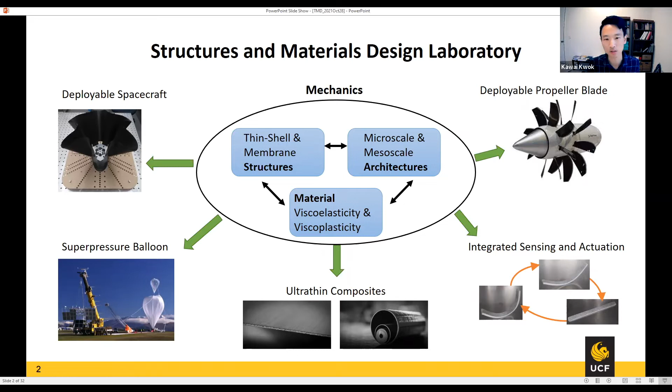So this is an overview of the different areas that we're moving on to, and you can see that all of these actually relate to the size of the structure. All the structures and problems that we work with have this common trait that their areas or volume are large, and there are a few purposes or reasons for that.

In space you want to harness the electromagnetic spectrum, for making antennas and telescopes, trying to manipulate that spectrum. And if you have a larger area in space, then you can obviously get a lot better signal. That is why they should be large.

Also solar arrays and solar sails are quite straightforward in why they should be large. Your larger arrays get you more solar energy. You can have more area span, and that converts more solar energy.

Solar radiation pressure is a propulsion. If you have a larger area, you can get a higher propulsion force. So it allows you to get some nice thrust in space for free.

And the last two bullets are harnessing buoyancy, and that is more on the volume. If you have a higher volume, then you can have a higher lifting force, and that relates to the balloons that we talked about.

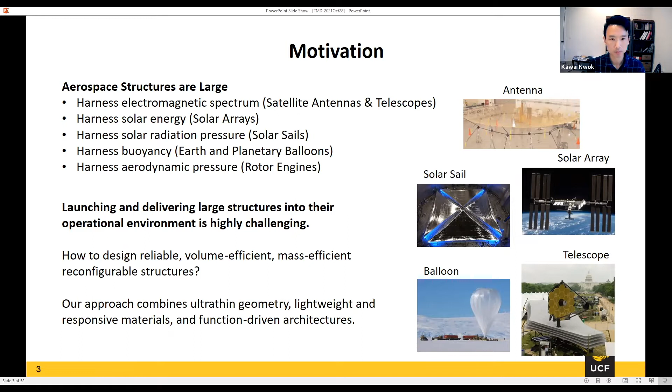There are two projects I want to specifically talk about - these are more recent work that we've done, so I feel more excited to share about those than the others. The first one is thin ply composite laminates, and how we model that, and try to understand the behavior and how we use that in looking at deployable spacecraft booms.

The second one is the integrated sensing and actuation material that we're developing, based on this shape memory polymer and also a carbon nanotube material.

So I'd like to spend a little bit more time on this one, mostly on the first topic, and some on the second topic. Most of them are centered more around the materials and architectures for making the structures. So the first topic is thin ply composite laminates.

Just a little bit of background on that. Thin ply composites are composites that are much thinner than traditional composites, and this is enabled by a process called a spreading process. Normally you have tows in a composite that are larger and contain a lot of fibers in a tow, and typically they are sort of teardrop shaped without very high aspect ratio. But there is a technique that spreads out these tows, and the end product is a spread tow of carbon fibers, with a much higher aspect ratio.

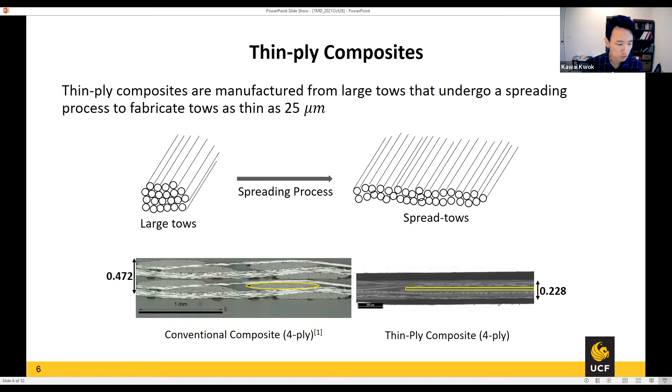If we take a look at the difference between the resulting composites, on the left-hand side is a traditional composite, with the tow circled by the yellow ellipse - that's the original one. In a thin ply composite, it's really thin - the same amount of fibers are stretched out so it becomes really flat. The idea is that you can really compress the thickness of the final composite, to use that small thickness to achieve high folding curvature.

There are some examples of composites used in space, just taking this from the literature. There are antennas, and the ROSA, which is a solar array structure deployed by two booms made of this composite. And deorbiter is a type of sailcraft in space that you can use to deorbit things you don't want in orbit anymore. So a lot of them are using composites now in spacecraft structures, and in particular deployable spacecraft structures.

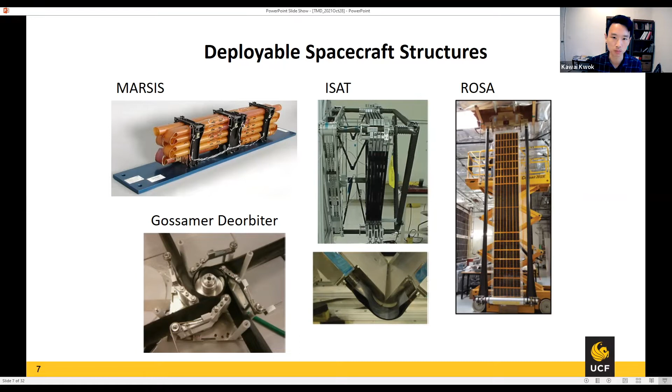One example we actually work very closely with at the moment is with NASA, on one of the missions they are working on - a new design for a solar sail system. They call it the Advanced Composites-Based Solar Sail System. Basically it's a solar sail with 4 booms in the middle, in the center, going across, and then you have a sail, a very thin membrane that is stretched out and deployed by the boom.

So the booms are kind of a structural support for that sail, and they intend to use this as a sail mission to look at asteroids and a little bit farther out in space without propulsion, without a propeller. The booms used to support that structure have a geometry that looks like an omega shape, made out of thin ply composite booms. You can roll it up, and eventually it's all stored inside a mechanism within the satellite, and that's how the whole thing is put together.

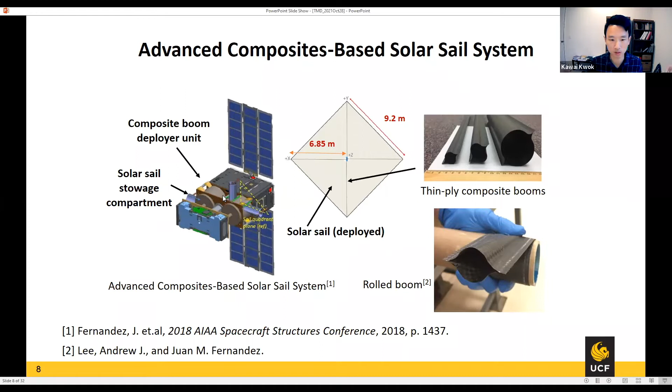Now, there's something about the mechanics of that shape of the boom. You can see from the previous slide it's really more like an omega shape, manufactured from 2 open pieces of a cylindrical type thin shell structure. This has been studied for many years - it's a building block that has been used very intensively in the deployable space community, and has been around for many years. Obviously they were not composites when they first came out, but they are increasingly made from composites now.

Just a little bit about the fundamental principles, so we understand how this works. Basically the mechanical principle behind this is a snapping instability. If you take a tape spring, you'll notice that if you bend it, suddenly it goes from uniform bending into a local buckling. Once you get into a local buckling, the buckle actually stays with the same radius - it doesn't change anymore. It can move around, but it is a state that is a localized buckle.

If you take a look at the moment rotation diagram of that, basically the behavior is that you have uniform bending and then you snap it, and the load drops significantly, and you have a local buckle. This is a very nice behavior to exploit, because you have a large increase in rotation - a large shape change - but you need only a very small moment to provide it. So this is a great way to make a deployable structure, because the loading applied and the shape change you get is not proportional to the loading applied. The loading is always low. So the snapping instability is really the thing behind all this work.

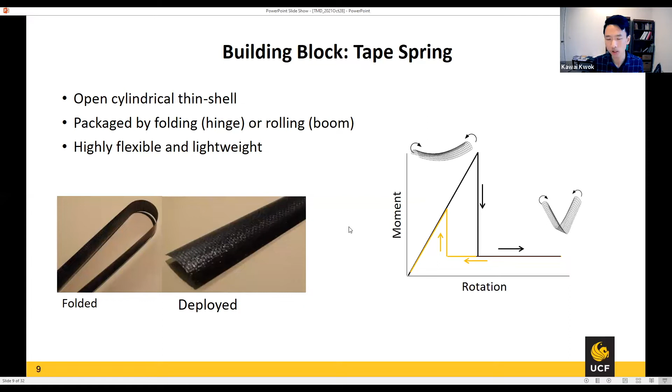So just go back to this real quick, right? On the unloading path, once you release that load, because this is a higher moment, it goes back to a lower energy state, and that will definitely go back if this is elastic, and it wants to go back instantaneously. But in the case that your material is viscoelastic, it actually does not come back instantaneously.

So there's some creep after deployment. There's still a recovery that can take a long time, and that is not a good thing for deployable structures, because we like to have the correct shape so that we achieve the same stiffness that we designed it to be, and the same shape accuracy we like it to have when it's deployed.

And also another thing that can happen is that you can actually change the structural behavior entirely, because one of the effects of viscoelasticity is to change the stability landscape of the structure.

Tape springs can be made into having different stable configurations, and there was actual work on that from Sergio Pellegrino. There was a very pioneering work on how you make bistable tape springs, based on elastic tape springs. Then later on, if we apply composite to make bistable tape springs, this problem comes up, that sometimes you actually lose the bistability if you store it for too long.

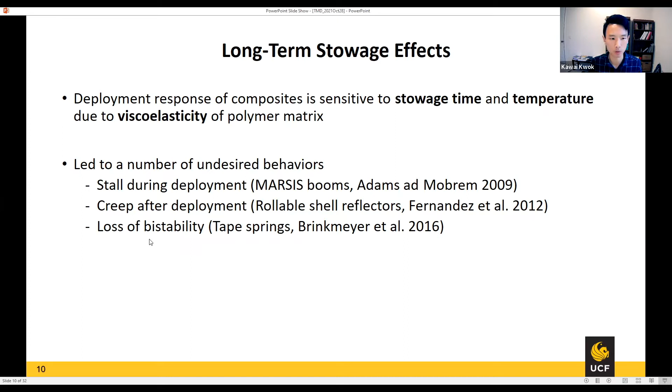So what we are trying to do here is understand that, and be able to model that composite material. There's a collaboration with NASA, mostly to look at the composite booms in the solar sail system they're designing, and provide the modeling capabilities to them, trying to understand different lamination, and how we can put a number on that stowage effect on the recovery.

So we started with sort of linear viscoelastic properties, looking at the matrix material and characterizing it. That's really the first step. This is a very fundamental thing about viscoelasticity, that you can characterize it at different temperatures, and you can form something called the master curve, which describes the modulus change over time.

So this is the experimental data that we obtained in the lab, for a particular epoxy that is a candidate composite material for that space application. You describe that relaxation modulus by something called a Prony series, so you can describe that for a very long time. Obviously we did not run this experiment for that long; it was actually combined from several different tests at different temperatures.

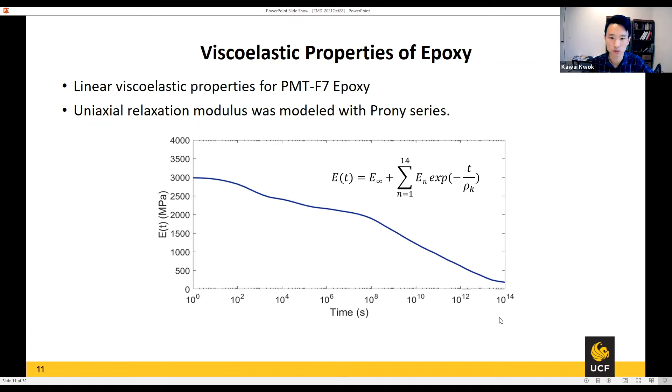And really, but then there is only the matrix. So to be able to look at the various effects, obviously, if you incorporate the fibers at different levels, that changes things.

Then you go to the next level architecture on the mesoscale, where you see this woven layer. If you use more than one ply, you get even more variation, because the plain weave pattern of each ply doesn't have to match up. Sometimes there are gaps between different layers, mismatches between those. In thin ply composites, these things matter a lot more than traditional composites, so we see a lot more variability from composite to composite.

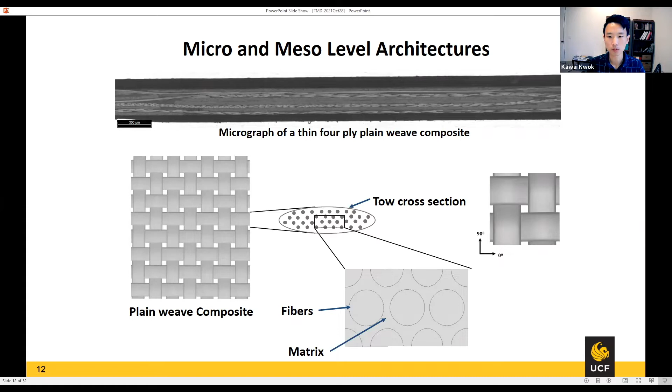The approach we are following is a two-scale micromechanics approach, trying to capture the micro and mesoscale variation of those fibers inside the composite.

We formulate a viscoelastic plate model. We take the Kirchhoff linear plate model and think about what happens if there's viscoelasticity. So we reformulate the whole ABD matrix of the composite classical lamination plate theory, but now with the addition of describing the variation over time of that composite.

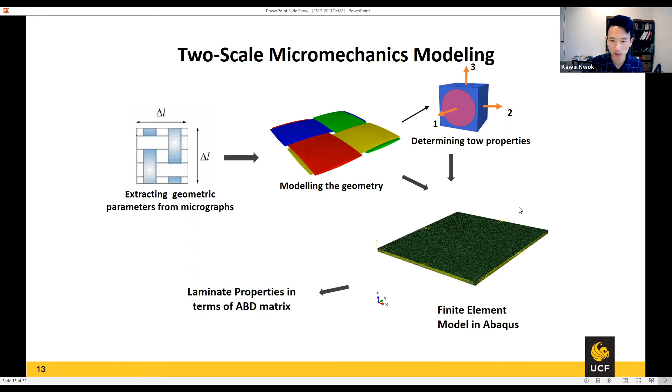The process goes from getting the unit cell on the tow, then to the laminate including all that geometry, and then to the finite element, carrying out that homogenization. In the end, we get a constitutive equation that looks exactly like a linear viscoelastic constitutive equation.

We have to do that at each level. The first level, when we do the homogenization or mechanics of a single tow, we have to preserve that this is still a three-dimensional continuum. So we describe that unidirectional tow as a 3D continuum with a stiffness matrix expressed in terms of Prony series. This is the classical Boltzmann superposition integral for viscoelastic material, so you have the strain or stress as an integral equation over time. This is no longer elastic but viscoelastic, and all of these are described by a relaxation modulus tensor.

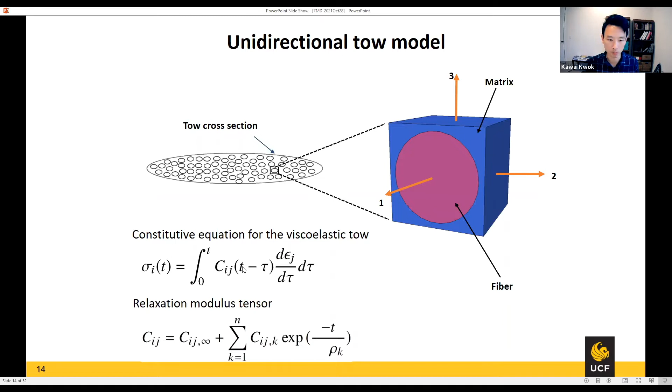Each of them is a Prony series, a series in time described by relaxation time. From the matrix characterized experimentally, and the fiber, which at the moment is assumed to be linear elastic, we can compute this general tensor, which is anisotropic but all time dependent. Taking from that we go to the next level, because each tow in a plain weave is now described by a time-dependent stiffness matrix C.

But what we really want is not to carry all these three-dimensional constitutive equations all the time, because that's very heavy for computation. So we do a dimensional reduction, just like plate theory, arriving at a constitutive equation in terms of moments and in-plane forces, which gives us less.

You can describe that with just the ABD matrix again, but now it's not elastic, it's viscoelastic, so all of these terms are Prony series. You can get that purely from the experimental and computational simulation.

This is a picture of what we actually have inside the simulation: a plain weave unit cell with 4 layers of thin ply composite making up the total composite. In this case, we're trying to do a bending simulation to get out the bending stiffness. D is the bending stiffness, A is the in-plane stretching, and B is the coupling between bending and in-plane behavior.

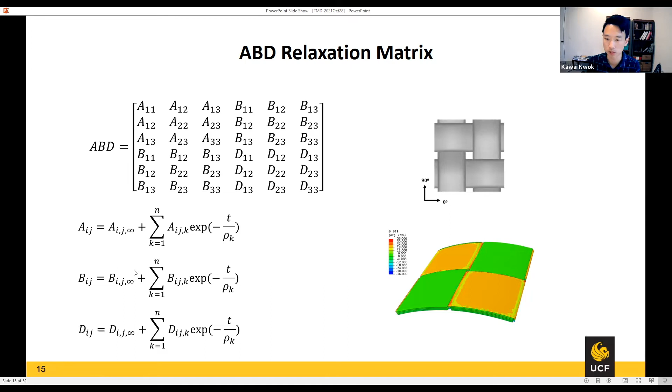We carry out some testing using a methodology called the column bending test. It's been developed in the community, mostly by a very nice man called Tom Murphey, who has been working in that field for a long time, doing very inspiring and creative work over the years.

So we are using that as a way to do the relaxation test so that we can validate our model. This has a few advantages over, for example, the traditional four-point bending test. And when it comes to thin ply, this elastic property characterization is even more useful.

When I did my PhD, I used a four-point bending test, and then as we go to a high temperature, we have to have a thermal chamber that runs around the sample, and a lot of vibration happens. Because the thin ply composite is so thin, all the noise generated from that four-point bending test just becomes very messy and kind of kills all the data from the test, because the relaxation typically is not very high.

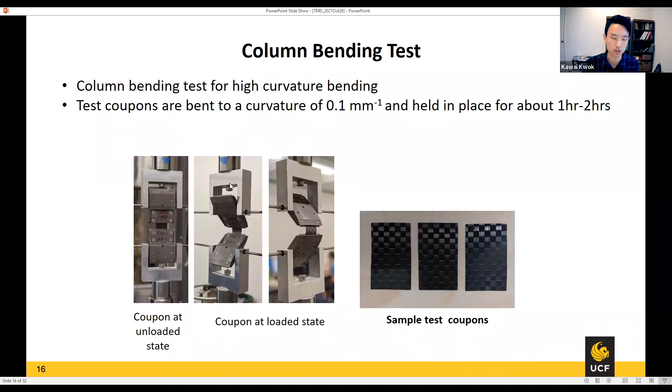The other reason is actually the curvature you can get to is a lot higher in this test. So basically, in the column bending test, you clamp the material inside the fixture and apply the compression force. And because that compression force is actually slightly offset from the sample, you create a bending moment.

M30S is the fiber, and that is the matrix that we're looking at, and we did this column bending relaxation test. Basically, we imposed a certain curvature and fixed it for some time. We'll see that the bending moment will relax over time, and that is what we want to capture, because that's what we compute from the mechanics model.

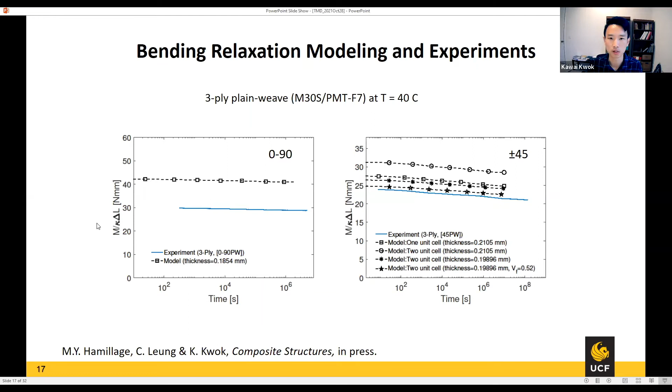But if you look at the time dependence again, they go down in a manner that is consistent with our simulation. So this is kind of a laminate-level validation and overall behavior.

So we went ahead and looked at this composite, and there are some funky behavior as well as we found out along the way. Some of these on the left hand side, we're plotting the in-plane relaxation, so it's just stretching, and we're expecting all of these relaxation to go down, right? So relaxation is always, the stiffness always goes down over time.

And if we apply in plane stretching of the composite, then the stiffness should go down. There are a few papers that also study similar things, and sometimes we get an upward going curve over time. I thought that was quite counterintuitive, so we took another look into it. Why is that, is that real? Is it just a numerical thing, or is it real because of something else?

What we found out is that it really depends on how you arrange your ply configuration. So A12 is the coupling - if you stretch in one direction, what is the coupling stiffness in the transverse direction? The other two have no problem, but that is the only thing that caught our attention.

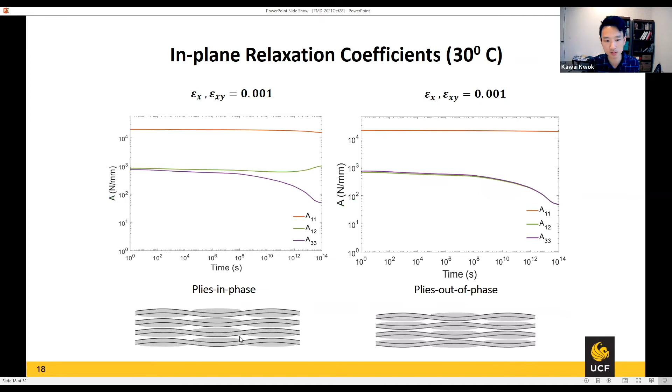If you look at an axis in the middle, you don't actually get a mirror symmetry. Because of that, you get a much stronger coupling in plane stretching configuration. In reality, the composite is not either of these extreme configurations, so you get a sort of random distribution. But it seems that geometric nonlinearity plays quite a big role, and how you arrange the ply makes quite a big difference on the properties.

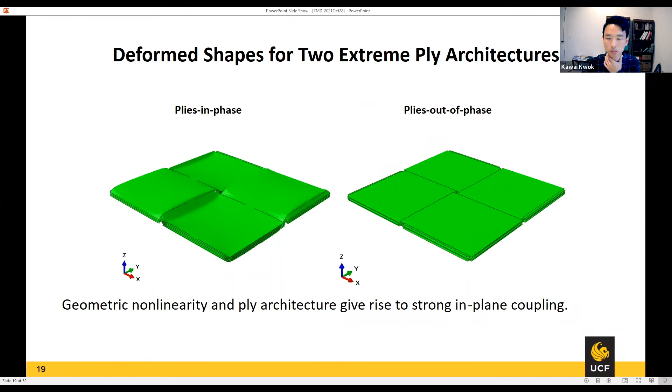The other response that we get from it is a localization response. So we take a look at this unit cell model that we have, and subject it to real high curvature over an extended period of time. We're trying to understand how this thin ply composite, if you roll it around for some time, suddenly snaps, breaks and fails.

It does not fail as you fold it elastically at the failure limit, but you hold it for some time and it suddenly fails. So it's a time-dependent failure, and we figured out how that could be, because it doesn't fail at the beginning. We thought it would just relax over time and shouldn't fail at all, not the first instant but sometime later. So that's another question we found interesting.

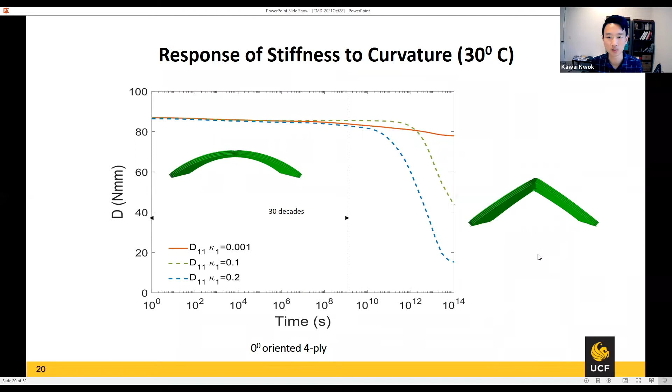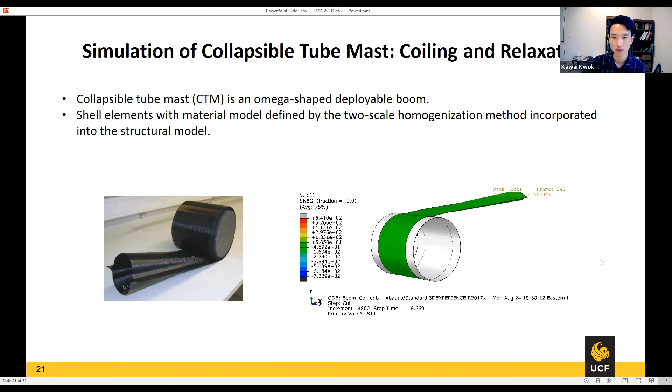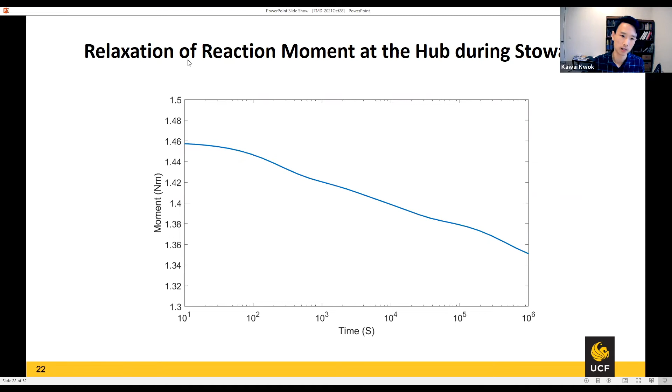We also want to apply this to simulate the actual deployable boom and look at the coiling and relaxation. This is an example we've been working on for the NASA mission, just to see how much relaxation we have - this is still work in progress. I'm showing the coiling simulation for the omega boom, now with the relaxation homogenization model incorporated, and we're able to run the coiling simulation. What we get out is how the reaction moment at the hub relaxes over time, which is something we can now predict from our model.

So I want to go to the second topic. I know I've been talking for a while, but I promise the second topic won't be as long. I'm going to show you some of the idea and what we're thinking about for the next steps.

The integrated shape actuating and strain sensing composite, as I mentioned before. The idea is to have a tightly miniature thin-ply composite that has not just stiffness properties and foldability, but also actuation, and strain sensing capability with embedded strain sensors. We make use of functional materials to achieve that.

We're also looking at a shape memory polymer that has this behavior where you can program the shape of the material by going through a mechanical cycle. So, in order to have both actuation and sensing together, we have to combine the capabilities of both materials.

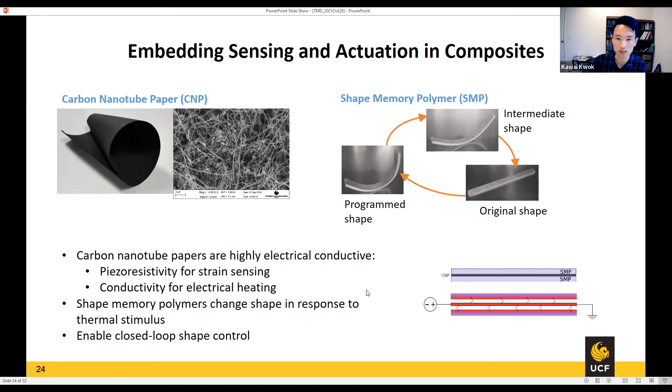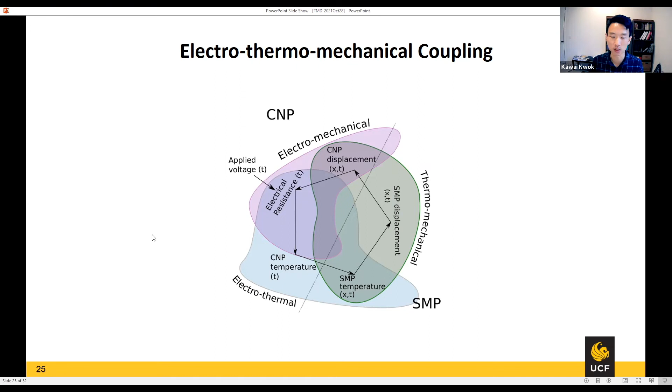So the problem really is a coupling between the electromechanical behavior, the thermomechanical behavior, and the electrothermal behavior. You have the carbon nanotubes that heat up, that heat conducted to the shape memory polymer, which can then change shape. That shape converts to some amount of strain registered by the CNP, and based on that strain knowledge, one can control that shape by modulating the temperature. This is the overall idea. We still don't have all the parts working together. We're looking at the shape actuation and the sensing separately right now, but we've gone quite a bit on both ends before trying to put them together.

Again, we use a viscoelastic model for simulation of the shape memory polymer. You can think of the programming shape as almost frozen. At very low temperature, the polymer doesn't have time to go back to its original shape. It's in the deformed configuration, it wants to go back, but the temperature is so cold for the polymer that it goes there extremely slowly. So it's almost like a programmed shape that is static. That's really the principle behind the shape memory polymer.

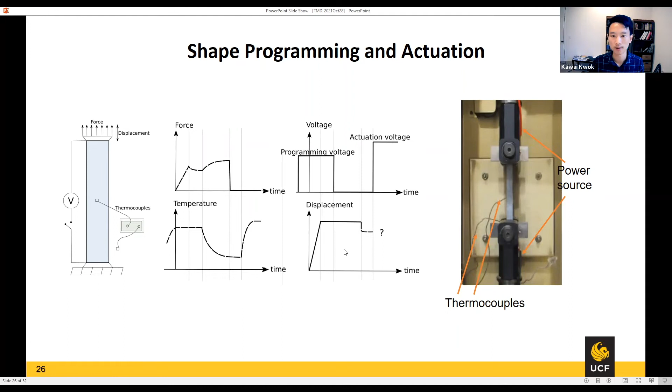We'd really like to be able to track that over time, and if all of these properties - the temperature, the force applied, and the voltage - are changing, are we able to track that over time precisely? So we have an electrothermal mechanical model: electrical input, how the heat conducts into the polymer, and a mechanical model for the polymer deformation. This is an experiment we run in conjunction with the model. We want to predict the displacement by varying different programming cycles.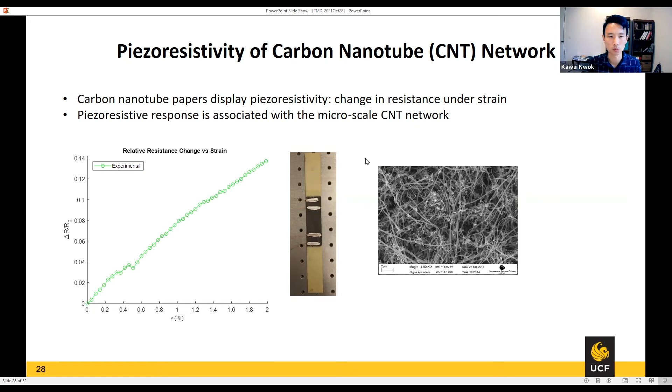But there are a few things about this strain sensing - the sensitivity, or strain gauge factor, of that carbon nanotube paper is not always very repeatable, depending on how the carbon nanotube paper is made. Fundamentally, it's a network of carbon nanotubes, a mesh, with a lot of microstructure effects going on. So what we did is try to understand this, thinking that if we can control the microstructure, we might get a more consistent gauge factor.

So this is a piezoresistive model we came up with - basically an electromechanical coupling model. What we do is distribute these carbon nanotubes inside a volume, then stretch it. Because of the network deformation, all these carbon nanotubes, which are conductive, change positions. Some go out of contact, some get into contact, and that's how the resistance changes, because the distance between these carbon nanotubes changes as strain is applied.

In each of these strain states, we obtain the positions of all the carbon nanotubes and conduct an electrical simulation. One of the fundamental mechanisms governing conduction is called tunneling conduction - two carbon nanotubes don't have to actually be in contact to conduct. Once they're within a very small distance, in close proximity, they can conduct, and that's called tunneling. There's a quantum mechanical equation you can use to model this, and that's what we did. We incorporated tunneling conduction, which is very sensitive to strain - once you go out of that tunneling range, you lose conduction exponentially, which is a good thing for a sensor because it means a more sensitive strain sensor.

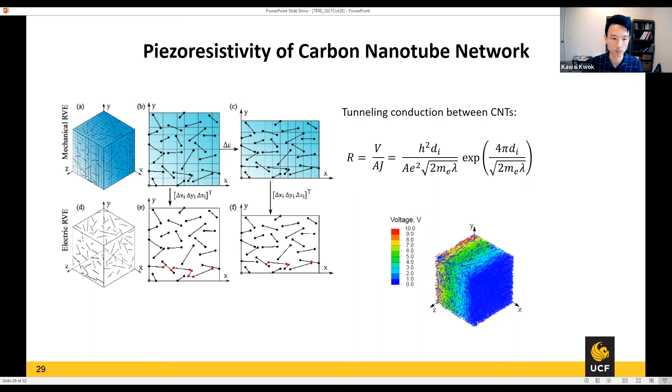This is work we just submitted, looking at how our model can predict that strain piezoresistive response. On the left hand side is just the total conductivity, a sanity check on the calculation - the conductivity as a function of the weight fraction, using different sizes of the RVE, compared with experimental data from the literature.

This shows the expected behavior, that conductivity goes up once you hit a certain percolation threshold. If you don't have enough carbon nanotubes, it doesn't form a conductive network, so conductivity is very low. But once you hit that critical point and the network is percolating, you get a very sudden jump in conductivity. Adding more will increase it further, but not by much - there's a marginal benefit to that. The triangles here are data points from the literature, and they're in quite good agreement.

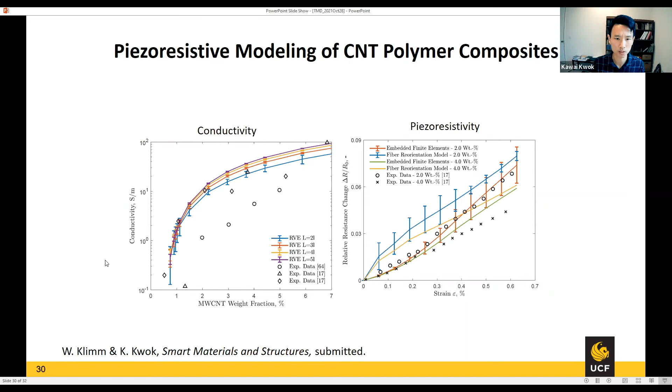This is my last slide. I think I went over time a little bit, I'm sorry, but just to conclude, a few quick summary points of what I just talked about.

A lot of these advanced materials, we can make use of micro scale, meso scale, and nano scale architectures where they organize and play an important role in controlling the composite materials. If we can embed and integrate all these different functionalities in a thin ply, I think that is quite a powerful technique and structure. We're not just getting stiffness from the carbon fibers, we can get a sort of sensing capability, and if the matrix has viscoelasticity that can be taken advantage of, we can have a variable stiffness material coming from that.

So looking at the micro and meso scale architectures and using these functional lightweight materials, I think that has quite a lot of possibilities. To do that, we have computational mechanics models to help us explore the landscape of design and understand the fundamentals of these architectures inside a structure.

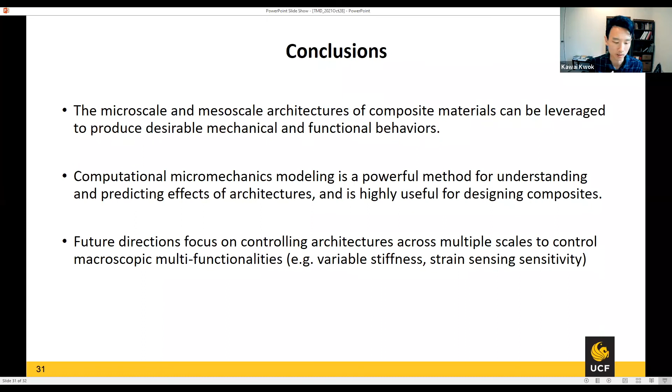So I think this concludes my talk, and I want to acknowledge our collaborators along the way. A lot of this work has been done by the students in the group, so they deserve the most credit. We've been supported, today's work mostly supported by NASA Langley Research Center and also the Florida Space Grant Consortium. So this is the end of my talk, and if you have any questions, I'm happy to answer.